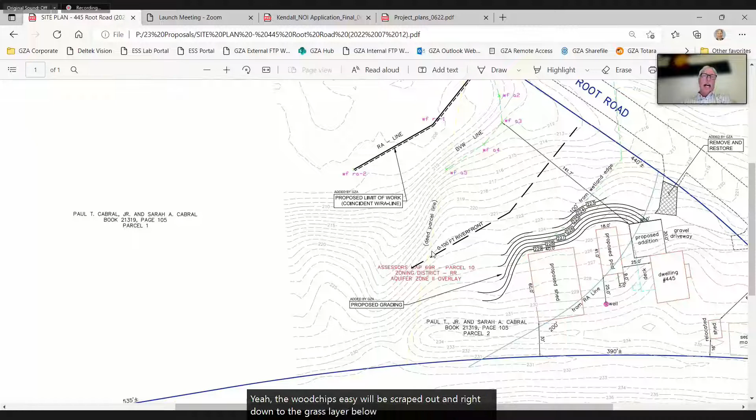This is really helpful. Is there any restoration being planned where that one stump was removed, and also the wood chips? Yeah, the wood chips will be scraped out right down to the grass layer below. Both sides of the wood chip pile have predominantly upland ferns, hay-scented fern, and some other upland species. So I think by removing the wood chips, those herbaceous species trapped underneath will start to grow.

They'll come up. The one stump in this curve right here, in the contour right above this label, that's kind of a flat area. We could put a couple of shrubs in there to replace the tree, or put another tree in if you'd like - a red maple would be good. I personally wouldn't recommend white pine because at some point that's going to be a problem tree and people will want to cut it down. A red maple is a little slower growing, I think that'd be fine over there.

Restoration within this area - we're open to putting in shrubs. We could replace all the tree stumps, the 10 tree stumps, with a native shrub, meaning native to your county. I'd have to take a look at those and I could give you guys a list. But there'd really be 9 - we have 1 stump in the 100 foot buffer and 9 outside, so it'd be 9 shrubs we'd be planting in this area.

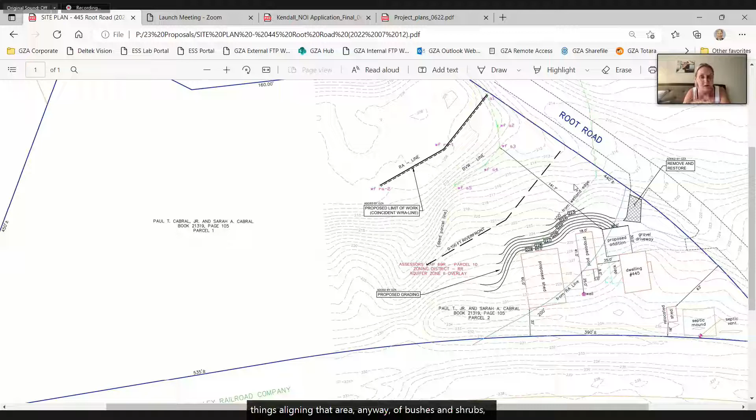I also spoke to Karen about that little dip area - this right here, yep - I planned on growing and putting things lining that area anyway, bushes and shrubs. So I do want stuff to help suck up some of this water for us.

Sounds good. As we mentioned at the site visit, we do have a list of shrubs. I did get it, yeah, I did get it, and I plan to pick from those - I think it was 3 or 4 pages, quite an extensive list.

All right, thank you. I noticed when we were discussing this on the site visit that you were thinking of changing the position of that large shed so it's not so perpendicular to the railroad tracks, but I don't see that on this plan. I know it was kind of close, you guys were concerned it might have been a little too close, and I said we could turn it vertically or keep it horizontally if you guys had a preference.

And I'll be honest with you, from a practical perspective, even if they rotated this, the grading would actually reduce. The limit of work will not change, even if they change the position of the structure. So I would suggest we look at the limit of work and the potential for sedimentation versus the angle, whether it goes with the contours or across them, but we'll never go outside this limit of work, this limit of grading. Because this is what we're telling you, we're not going past this line.

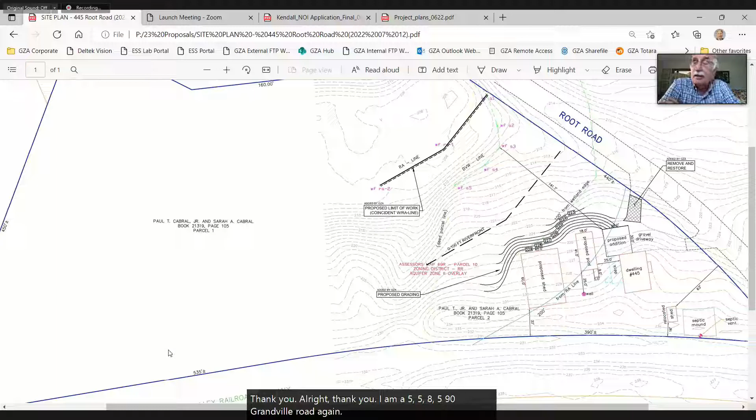Item A, 558-590 Granville Road, again continued from 6/28/2022. Dan, could you please stop sharing your screen? Yep, sorry about that. Thank you, I'm trying to get out of this. There we go. Thanks, everyone.

Okay, Ryan, you want to give us an update? Sure. Hello everyone, Ryan Nelson from R. Levesque Associates. We've been in talks with DEP on their issuance comments, and we're in the process of obtaining a consultant to conduct a wildlife habitat study due to some of the thresholds for alteration. That has not been completed yet, so we're requesting a continuance for tonight.

Thank you, so I'll entertain a motion to continue until 7/26. So moved. We have a second. Second. All in favor? Lauren, yes. Carl, yes. Yes, I'll vote yes as well.

Thank you. Item B, 0 Bayberry Lane, Samuel Shokov. In accordance with the provisions of Massachusetts General Laws, Chapter 131, Section 40, a public hearing will be held at 6:30 PM on Tuesday, July 12, 2022, by virtual meeting regarding a notice of intent submitted by Samuel Shokov for construction of a single-family home and associated site improvements at 0 Bayberry Lane, 46R-59 and 46R-60 in Westfield.

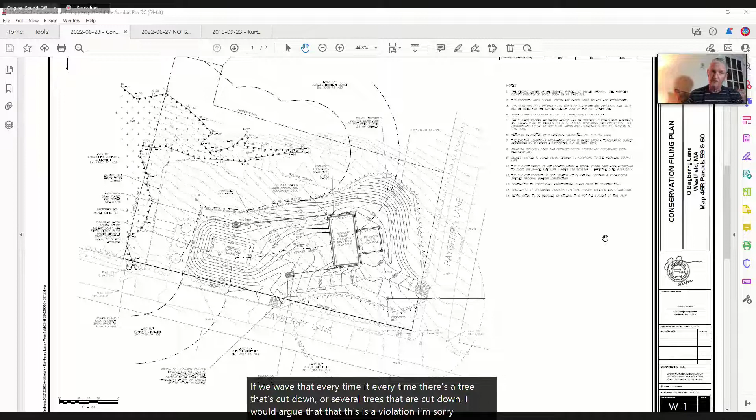I would argue that this is a violation. I'm sorry you don't have room, but there must be something that could be done. We're proposing to restore the inner 50, but the violation is going to be part of the work zone under a notice of intent. So your solution is to plant 3 maple trees, correct? For the area within the 50 that was altered, yes. Right, which is what the commission requested of them, was to restore the 50 feet. That was the motion.

Thank you, Tom, we can take your suggestion under advisement later in the meeting. All right, entertain a motion to close the EO and let them continue with the NOI. I'll make that motion. Second. Any further discussion? Seeing none, all in favor: Lauren yes, Carl yes, Tom yes, I vote yes as well, thank you.

Okay, we're back. Entertain a motion to resume 4B in regular order. So moved. Second. All in favor: Lauren yes, Carl yes, Tom yes, and I vote yes as well. Okay, on to the NOI. Thank you.

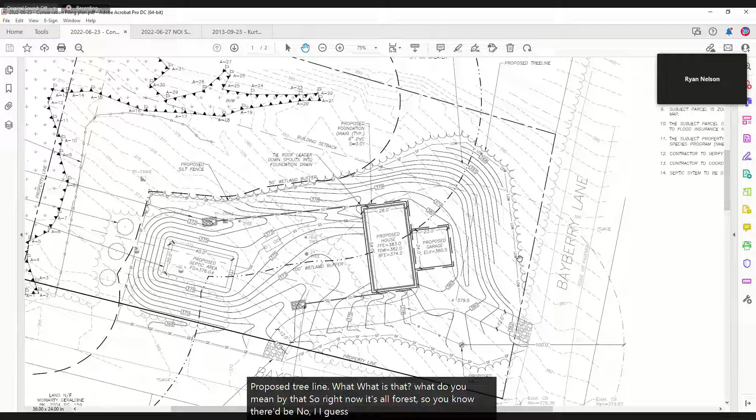All right, thank you. Ryan, what do you mean by the proposed tree line at the very top right of the drawing? So right now it's all forest, so at the limit of work is where the forest would start - just trying to show an envelope of where the forest would remain. So there's going to be a whole mess of trees cut down within the 100-foot boundary, is that correct? Yes, this area right in here - this is the 100-foot boundary. And it's pretty much all trees right now? Yes. Thank you.

Are those the current trees you have labeled, like the pine tree by the septic system - are those going to be cut down? Yes, those would be removed. This existing tree line just shows the limits of clearing that occurred a few months ago, and we located some lone standalone trees that were left for whatever reason within that clearing. But all the trees within the limit of work would have to go due to the site grading here.

Okay, other questions from the commission? Do we have DEP comments? Let me pull those up. We have a file number, 333-818.

I think there were 2 comments. One had to do with the latitude and longitude being incorrect, and it was corrected. The other had to do with some other minor thing I can't remember. We're on B, not C, excuse me. The latitude's on the next one. I believe it was the same comments. Unless I'm getting them completely mixed up.

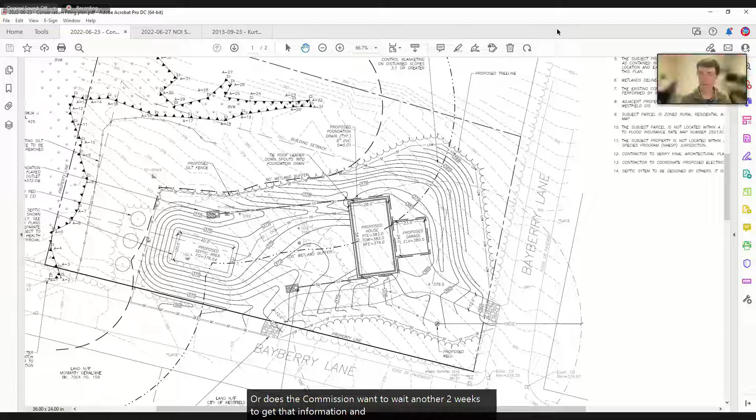Since we're dealing with a potential order of conditions, do you want this administrative addition to be part of a special condition, or does the commission want to wait another 2 weeks to get that information? In this case, I think I'm all right with it. DEP's concerns seem pretty minimal to me.

All right, thank you. Any other questions or comments from the commission? Any questions or comments concerning this project from anyone in the audience? I have to read 3 letters from concerned Bayberry abutters.

First letter: my husband and I live on Bayberry Lane across from where this gentleman wants to build, from what I understand, a 5,000 square foot barndominium. I don't see this as a one-family home. This house and the other proposed houses are to be built on wetlands. Just go look at the water in the holes that are there from their clearing of the land. This area gets very wet, especially in the spring. The road is not the best of repair and gets worse. Oh my God, sorry, I hate thunder.

A lot of the runoff has come from the area he has stripped of vegetation, thus increasing damage to the road. Years ago there was a for-sale sign on that land. I asked the realtor if it had perked. She said no, but it will. It had not perked in the past, and a few days later the sign was gone. I stopped where there was action this spring and asked what they were doing. I was told they were testing it to perk. I said it hadn't in the past, and he told me, we will make it perk. Now it is nothing but a wet mess with runoff to further damage an already wet area. Signed, Leslie and Tom Perry, 62 Bayberry Lane.

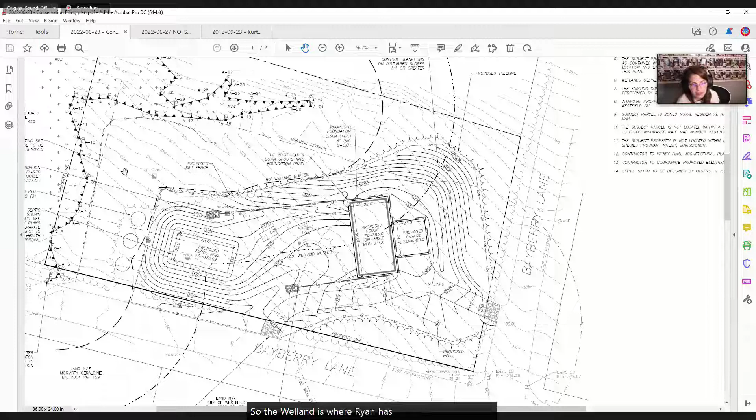When you guys were out there, were you walking in water? Is it as wet as she makes it sound? The wetland is where Ryan has it mapped. The site right now has been disturbed because it's been cleared, so there are holes where there is water, but it is not a wetland.

Can she speak to where they did the perc test? I don't know where she's talking about. The groundwater is shallow there, within a 20-ish range. There were some areas in the clearing out front where they pulled the stumps, and it leaves a 3-4 foot hole. That's below the groundwater table in early spring when they probably saw it, so it filled up, but that has all since receded.

We good for the next letter? I mean, when we were out there last week, I didn't see any standing water.

No, no. Okay, next letter.

Since then, I've spent the past 5 years living a totally changed existence due to the accident. It left me with debilitating back injuries, including continuous chronic pain from spinal compression fractures and nerve damage. This included many episodes of suddenly becoming paralyzed in both legs, being unable to get up, sit in place, or walk.

With additional health issues, I have needed to call 911 for frequent assistance and transport to Noble Hospital. I need to use PVTA to get to most medical appointments. I have been mostly homebound otherwise.

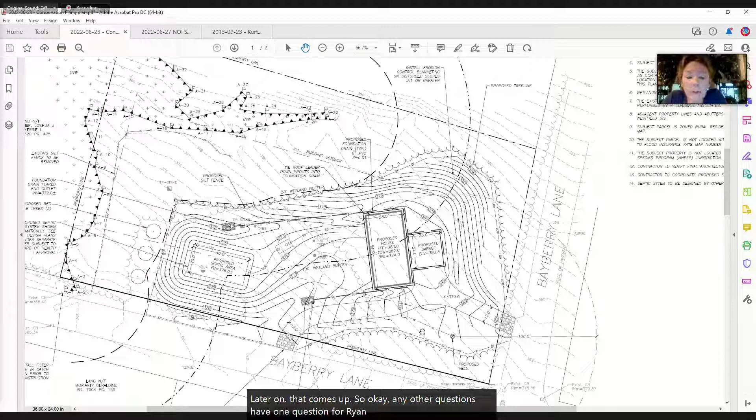Okay, any other questions? I have one question for Ryan. Did you consider dry wells, or is that even an option here? I don't know where your groundwater is, but for that concern, I think what I'm hearing from the commission is about flow onto the road, which I think is a legitimate concern of the neighbors. Is that an option?

We don't have a lot to work with due to groundwater elevations. There's only about 20-something inches down to seasonal high groundwater. We could perhaps put some in the higher fill areas, but then you wouldn't get gravity flow from the drains to those locations.

Right, it might be effective in summer months, but when you have spring and fall and groundwater's high, they'd just be submerged, I would think. It wouldn't be helpful around the actual building itself.

You think you don't have enough room? No, there's room, the problem is you'd be within the groundwater table. Yeah, that's what I meant, room. Yeah, just trying to think of alternatives. No, that is a good idea. If that groundwater issue wasn't the case here, I definitely would be in favor of that.

The outfall that's going towards the left, the bottom one, how are you going to stabilize that? There'd be an armored stone riprap flared end outlet there.

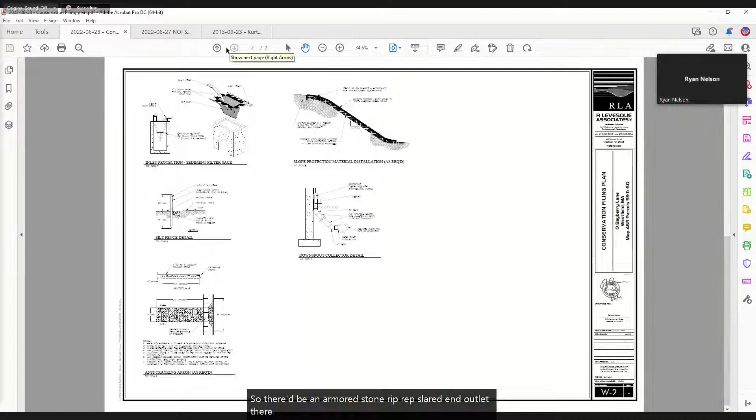I don't have a detail of that, but... is that the best location for it? Yes. We wanted to put it down gradient of the driveway, so we're not washing out our driveway. And we didn't have the elevations to get it over to here because there's a septic tank and a sewer line in the way.

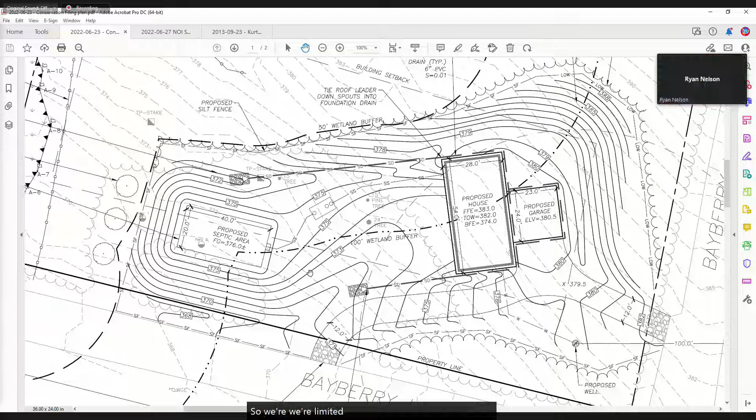So, yeah, we were limited based on where the leach field had to go. You didn't want to put it any farther to the left?

So it daylights on existing grade here. I mean, we could continue it farther, but then we're getting into the town property. We could go a little farther, maybe 20 feet or so, we could certainly do that. I just wanted to give it room to disperse before it got onto the town property.

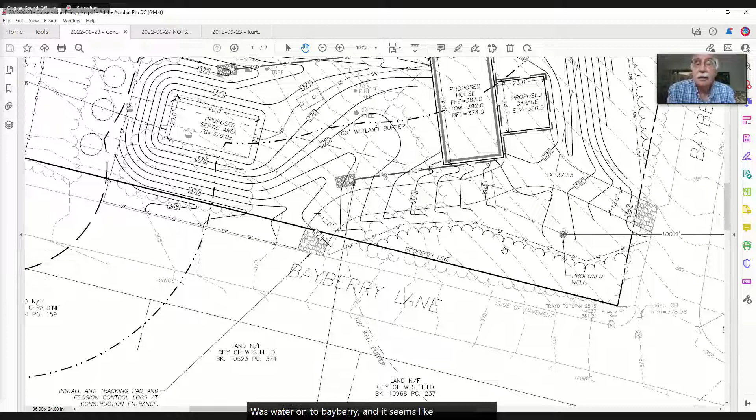Well, it seems like the main focus of those three letters was water getting onto Bayberry. And it seems like your mitigations here, especially with the new swale, would help to alleviate that.

One of the letters also mentioned signage. Is any signage going to go up on the property? As always, shame on me, I should have put it on the plan, but yes, we can put signage along the limit of work. That's no problem. Nice observation, Lauren. Thanks, Tom.

Okay. All right, anything else?

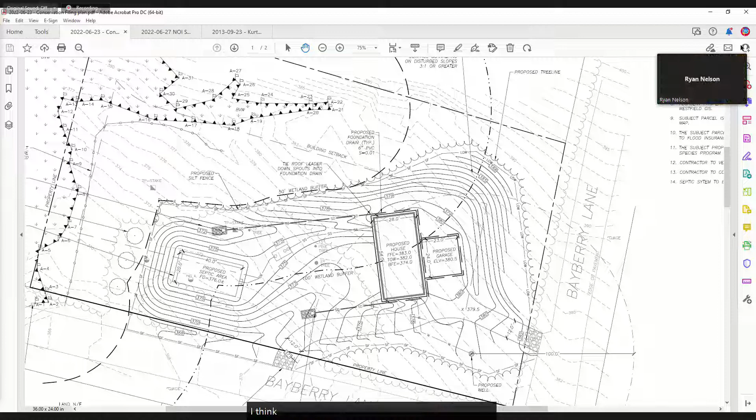Do you have sign off from the health department yet? We have not submitted septic plans to the Board of Health yet, no. Do you anticipate any problems with that? If you would have to, if they would require you to change that, that may affect this application. I don't foresee any changes. We've sized the system based on the design flows.

It's elevation wise, it's all roughed out. I mean, we pretty much designed the septic, just haven't submitted it yet. So it's been designed to Title V standards, so I don't foresee any changes needing to happen.

Is that a concern, Karen, if we approve this? Only if the Health Department did not approve of what we're seeing and they had to alter it in some way. Right, that's my only concern. In which case we would come back to you with a revised plan, but this would be closed. So for a notice of intent, that's my concern.

You know, you're not going to be building this next week, so do you want to go through Health Department, keep this open to make sure that is copacetic with them, and then you get commission's approval? I'm pretty confident, we really have no other option or location here, so.

But we think if we approve, we'd like to get conservation approval first, and then we'd submit to Board of Health, and if things change, we can come back with an amended order or something. Could that be a special condition?

It would have to be a new order, right? Well, depending, but yeah, I guess that's your risk, the risk you're taking. You recognize it. Okay, gotcha. What is your time frame for Board of Health?

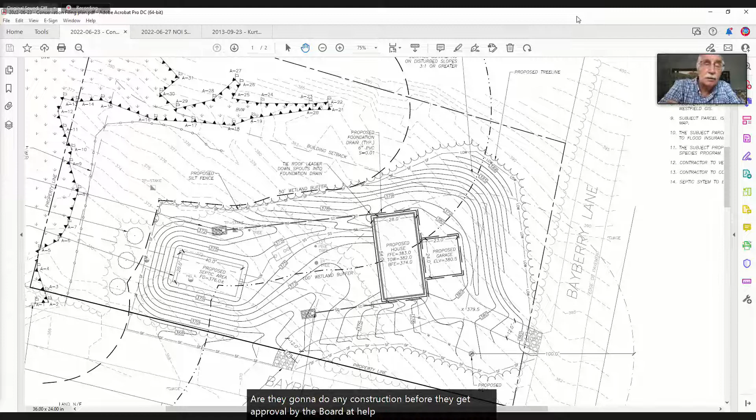Are they going to do any construction before they get approval by the Board of Health? Maybe, I doubt it. I mean, he wouldn't want to invest any more in the property if it's not viable, so he'd probably wait till he had all permits in hand.

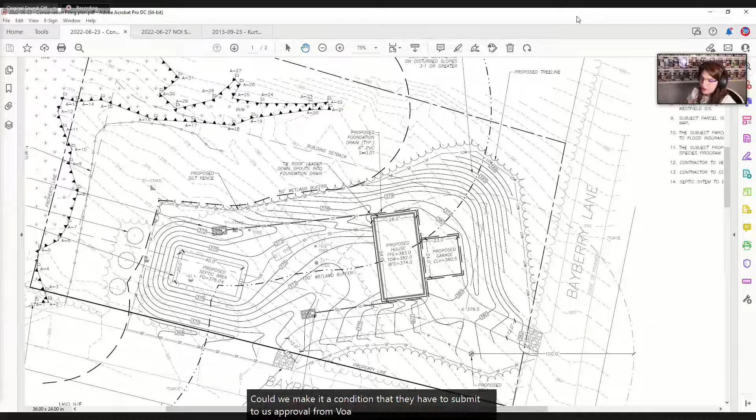Could we make it a condition that they have to submit to us approval from BOH prior to construction? We do that regularly, but the concern is if the Health Department looks at their plans and changes them, and we've already approved a certain configuration, if that makes a change, then they actually have to do a new notice of intent if it changes it significantly.

So that's my concern. But many times the commission, I'm sure the commissioners remember, puts a condition saying before you put a shovel in the ground, you've got to submit approval from the Health Department to the commission. That sounds like a reasonable condition.

But that seems to be the only place where a septic system could go. Right, and Ryan's pretty confident. Well, it's their money, I guess, if they have to do another NOI. Because once we approve this, that's it.

So are you that confident, Ryan? You're suggesting we close the hearing tonight? Yes, if we have to revise things later on, we'll address it then, but this is the only option for a septic area as of now.

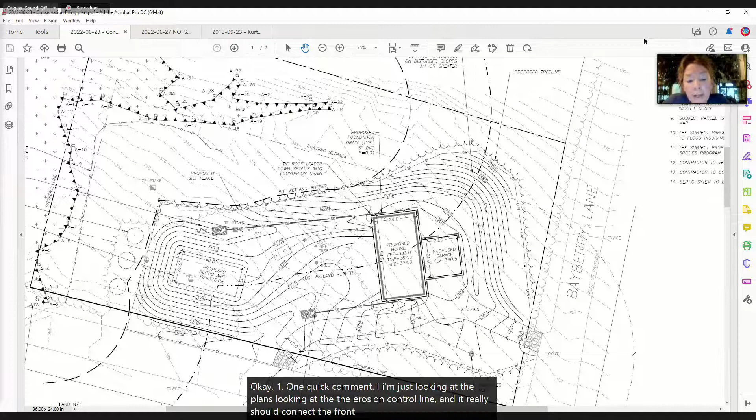Okay, I have one quick comment. I'm just looking at the plans, looking at the erosion control line, and it really should connect the front of the property by the septic. It doesn't enclose the entire property, unless I'm not seeing it. Wait a minute, am I not seeing it? Where are we talking here? Oh, it does, across. I'm sorry, yeah, I am wrong, I didn't have my glasses on. It's okay, a lot going on. You mean the silt fence at the bottom? Yeah, I didn't see the line there, that's all. So they're covered. Thank you.

All right, so we have a motion. Do we have a second? Yep, I'll second it. Any further discussion? Seeing none, all in favor? Tom, yes to close. Lauren, yes. Carl, yes. I'll vote yes as well. Thank you. All right, you want to post the orders, Anna? Yeah, thank you.

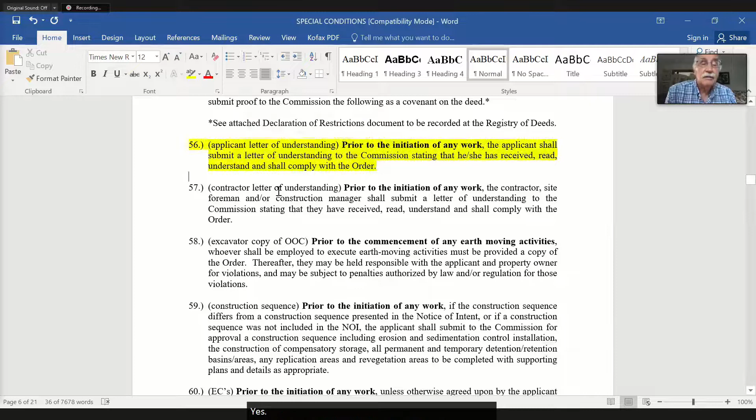Okay, here we go. So there's no SWPPP involved here. 52D, grabbing my recording mouse, yes. DEP sign, yes. Deed restriction language, yes. There's no wildlife habitat involved. 56, yes. 57, yes. 58, yes.

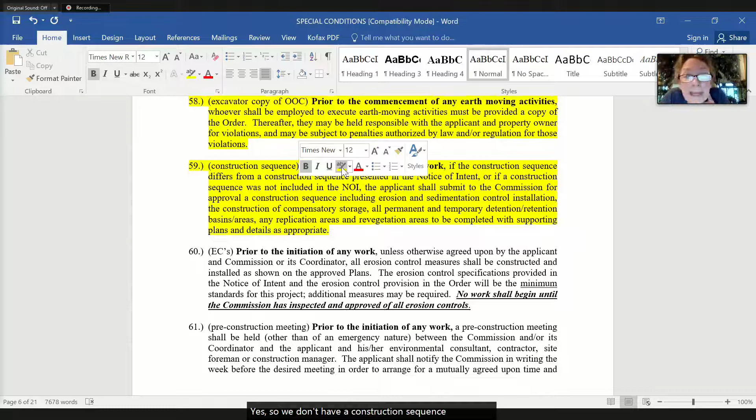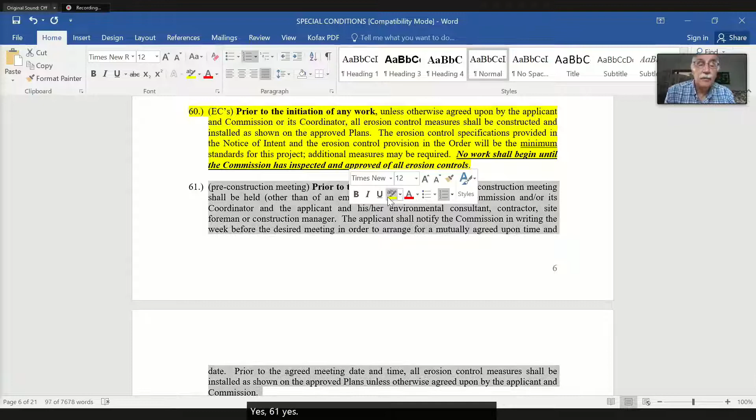59, yes. So we don't have a construction sequence, so that's going to be something, Anna, that you'll look for. Okay. 60, yes. 61, yes. 62, yes, and 63, and 64. There's no 65.

66, yes, they're putting markers up. Do you want markers, or do you want signs? Or aren't they the same? Two different things. All right, so let's do 67 then. So what do you want for signs? Be specific. It's usually every 50 feet or change in direction.

We had some changes last time. I wasn't given specifics, and I called Karen and asked what do you think they would do. Typically you guys have done every 50 feet or every change in direction. I thought usually we did have a policy on that, Karen. Didn't we? We never adopted a policy about every 50 feet. I thought there was standard language. This is right here, number 4, yeah.

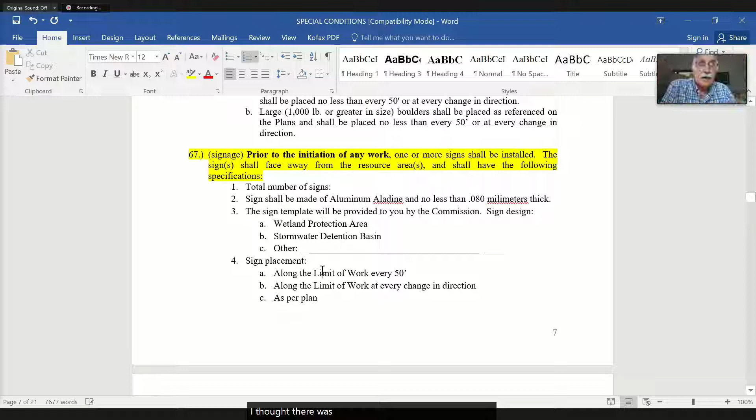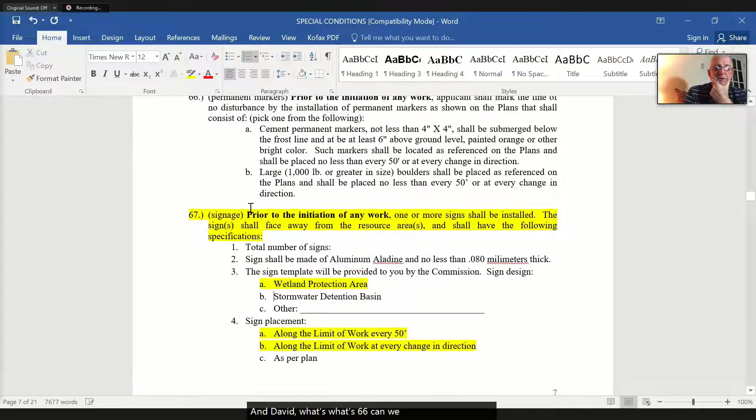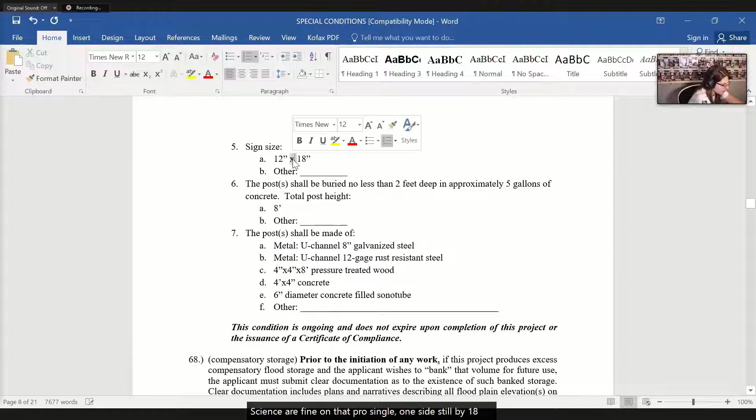All right, do A and B. Okay, and David, what's 66? Can we do both? Well, those are markers, like boulders and stuff like that. Signs are fine on that, single family, I agree. I thought it was something else. Okay, sign size, 12 by 18. Yeah, the typical sign, Ryan knows what they are.

And I never really got a good answer. We do have a policy, don't we, Karen? Didn't we? No, this is it. We never instituted a policy, we incorporated it as a condition. So we never made up something simple on one page that we send to applicants? Nope, this is it, this is what they get when they get their permit. You get to make the decision right now, right here, what you want. That's pretty exciting. All right, thank you.

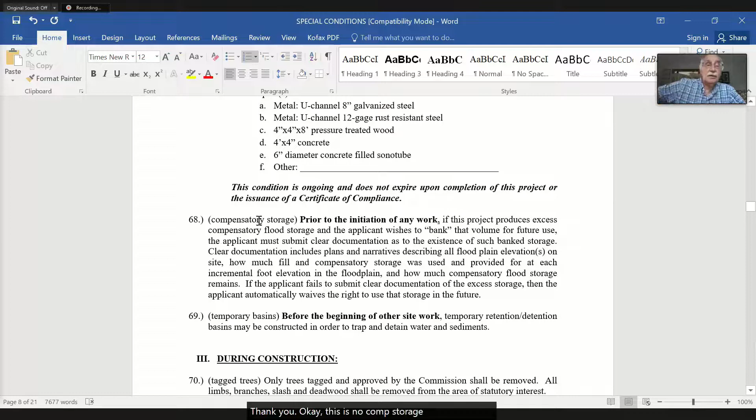Okay, there's no comp storage, there's no temporary basins. No, 70 wouldn't be appropriate, I don't think, because we have a limit of work. Right, there's no permanent basins. No salt. Not for a private home, I don't think so either. Okay, so on to 75, I think. Okay, yeah, so 75, yes.

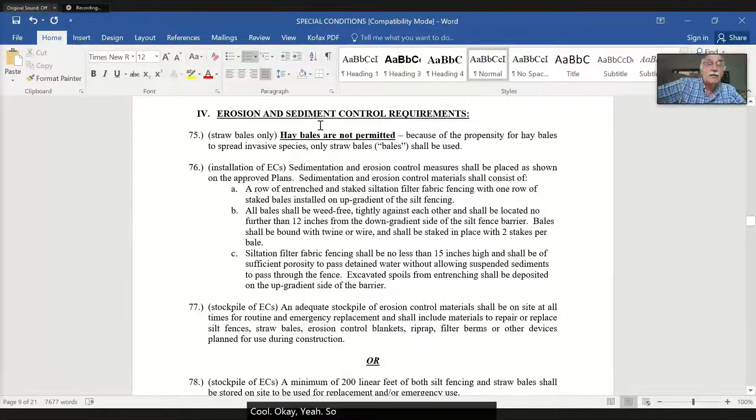Oh, my computer's frozen, please hold. Work with me, oh my gosh. Okay, all right, 76, yes. And 77, yes. Okie dokie.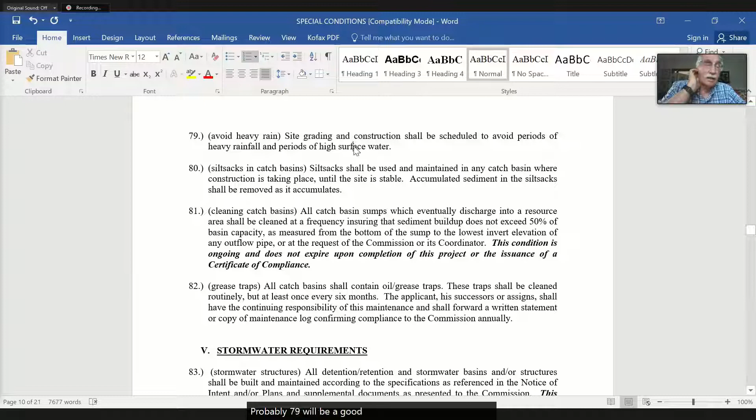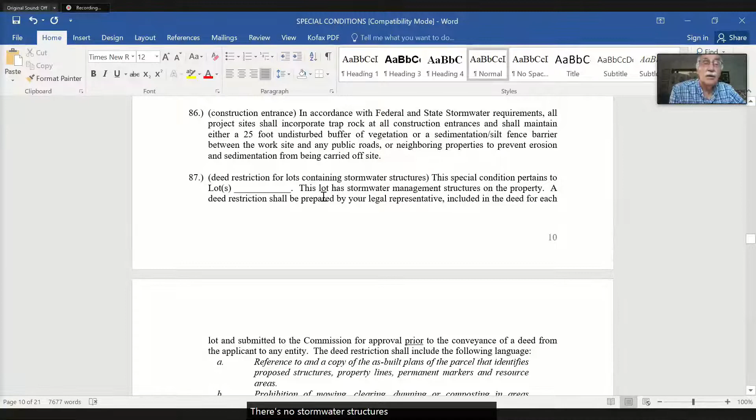Probably 79 will be a good one because they're cutting into the side of the hill. Okay, there's no catch basins involved, no grease traps, there's no stormwater structures. Wait, go back. Okay, well, they are actually having a construction entrance. Yeah, they put two of them on their plans, so you might as well put that in there. He did mention putting mats there. Okay, keep going, thank you.

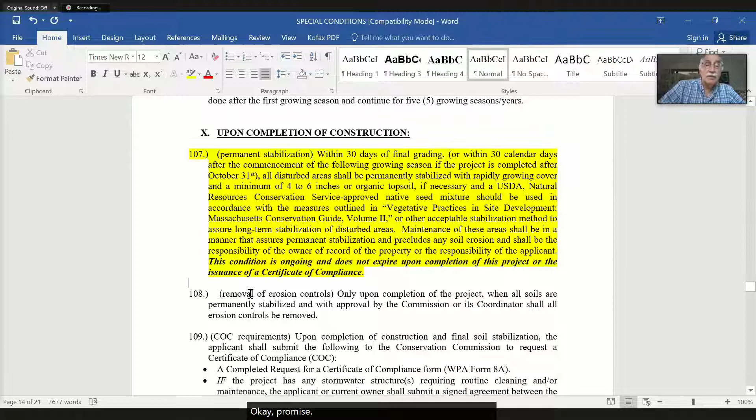All right, there's no environmental monitor, there's no dewatering, there's no dredging, there's no replication. Okay, permanent stabilization. Okay, 108 and 109.

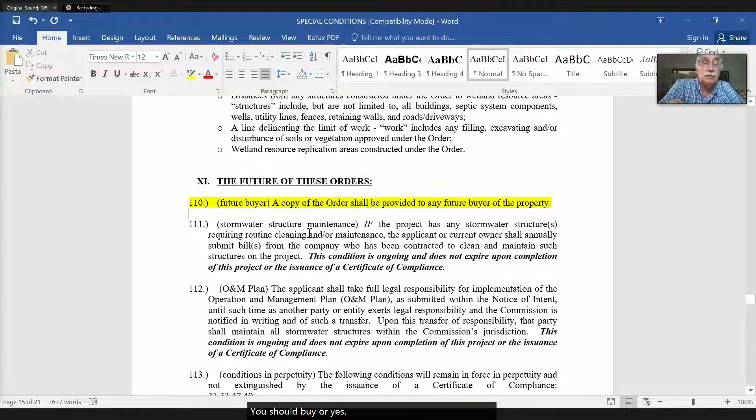Future buyer, yes. 111, we don't have stormwater. No stormwater.

How about maintenance of their outfalls? Well, it doesn't fall under stormwater. We could add a special condition that they keep them maintained, free and clear of debris, something like that.

Okay, so we'll add that as a special condition. I think you missed 109. It's highlighted all the way. Oh, gotcha. Okay, thank you.

Where would you like to add that as a special condition, before or after future of these orders? Upon completion of construction. I'm going to put it right after 108.

Maintenance - what do you call them, outfalls? I'm not sure what the technical term is. What did he call them on the plan? Call up the plan, because he did call them something. Give me a second.

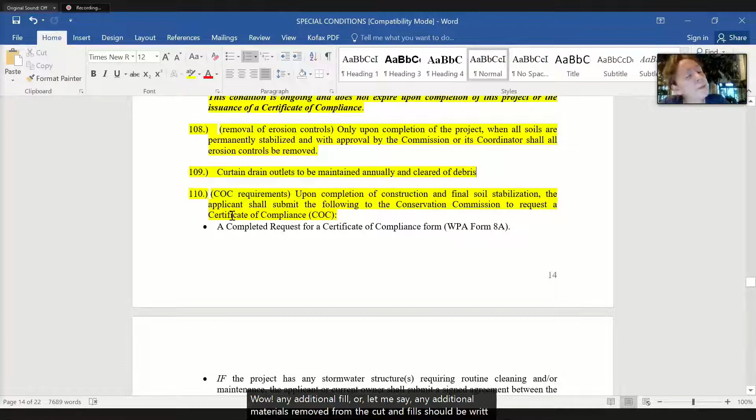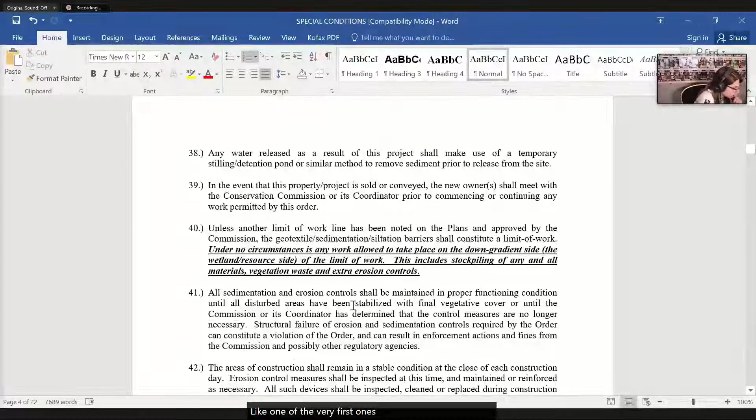What else? Any additional fill or materials removed from the cut and fills should be removed from the site. You don't want them throwing any stuff in the wetlands. Isn't that technically already a condition? It's like one of the very first ones. You can say any materials generated from the project shall not remain on site, you know.

We'll just add it as a special condition at the end - any extra fill shall be removed from the site, or cutting of trees, stuff like that, because they're going to be removing a lot of vegetation. You don't want them throwing it in the wetland.

All right, anything else? All right, bond. Oh, Jim, yeah.

It's buffer zone. What's typical for a single family, 5,000? Or is that too much?

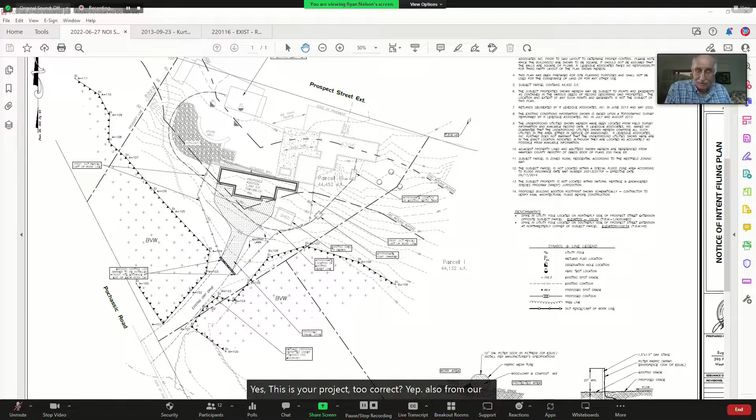Here's our site plan. This is a bit of a unique circumstance, so let me give some background history. The site is located near the Y intersection of Prospect Street Extension and Pochassic Road. The Kurtz's existing residence is this building here. Quite a few years ago, they submitted a notice of intent to build a retaining wall and do a septic system upgrade—they have a tank and pump chamber in the backyard that pumps up to the septic. As part of that NOI, they also included filling of a BVW near Pochassic Road and then replication. That work had been completed. However, the addition proposed at the rear of the home at the time was never completed—only the wetland crossing and replication work was done.

One of the DEP comments was whether a certificate of compliance had been issued for that work. I believe it was—Anna can back me up if I'm incorrect. Yes, on March 20th, 2000, the COC was issued.

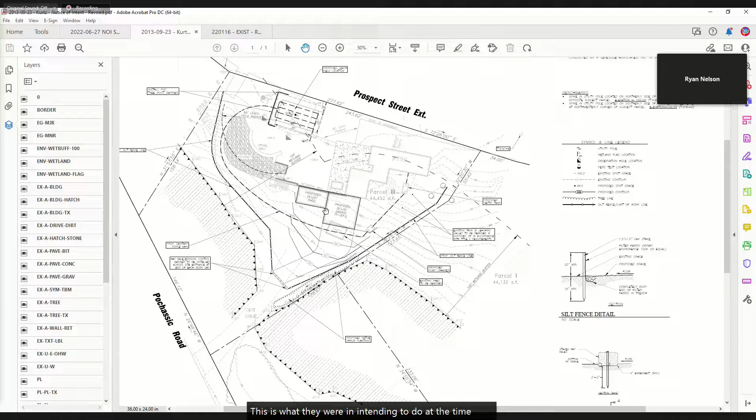So fast forward 20-something years, and the property owner would like to construct that addition at the rear of the building. We recognize where the building was formerly proposed—if I flip back to this old NOI plan, this is what they intended to do at the time: a 30 by 30 garage, and maybe a 16 by 20 addition off of that. On this plan only the 100 foot wetland buffer was shown; the 50 wasn't shown, but presumably most of this addition fell within the 50.

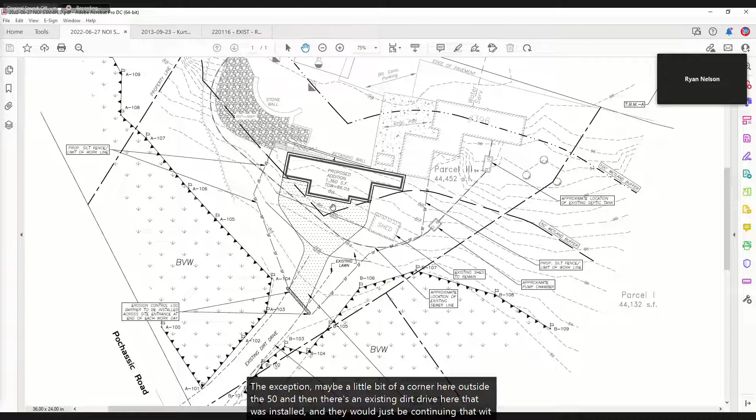We acknowledge Westfield's new bylaw regarding work in the 50-foot buffer, so the homeowners have shifted their proposed layout to be as conforming as possible to the 50 foot. We're keeping most of the proposed addition—this outlined building—with the exception of maybe a little corner outside the 50. There's an existing dirt drive here that was installed, and they would just be continuing that with some gravel up to the garage door faces of this addition.

So the limit of work would stay the same as originally proposed—just a silt fence going off the back of the house down to where the driveway work would resume, and then back up to that existing retaining wall. This is all taking place within existing lawn area. There'll be no cutting or removal of trees necessary, and very little change to grade—just maybe filling up half a foot or so, adjusting to get a nice slope up to the entry of that garage or barn area. So this is just buffer zone work within an existing lawn area.

Questions, anyone? So you say no trees will be removed, is that right, Ryan? Correct.

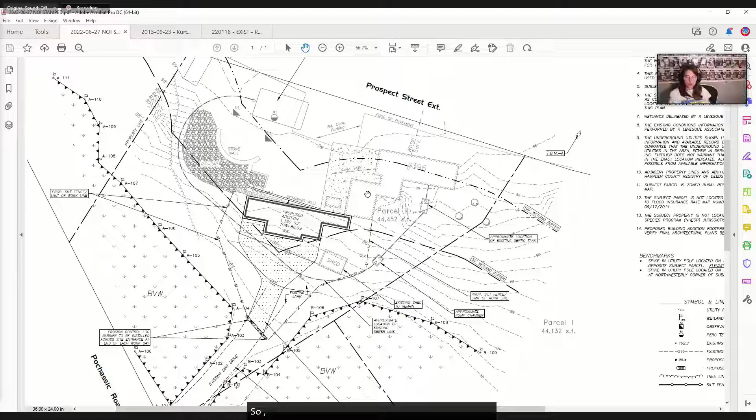Yeah, the design doesn't look different from what we discussed at the site last week. At the site, Ryan had said that only a small corner butted in and then went along the retaining wall. That is what is being presented here.

Ryan, that shed—is that being removed or staying? That's staying. That's staying, okay.

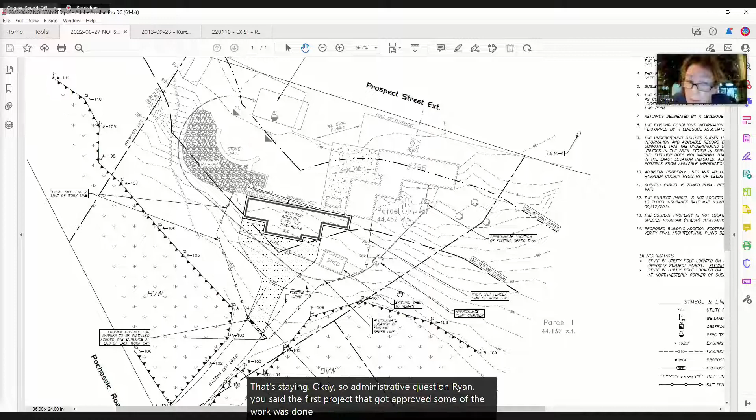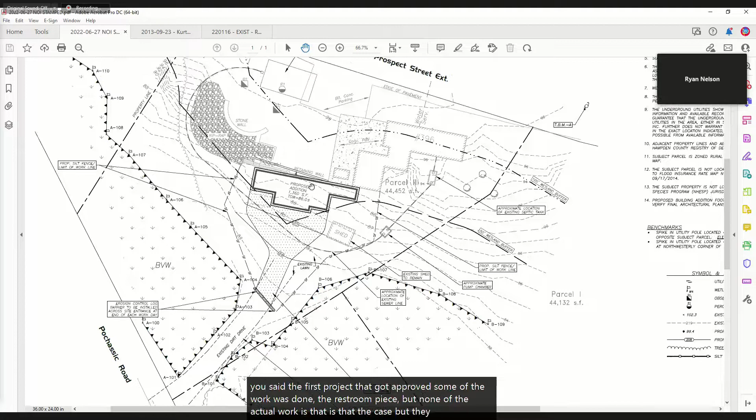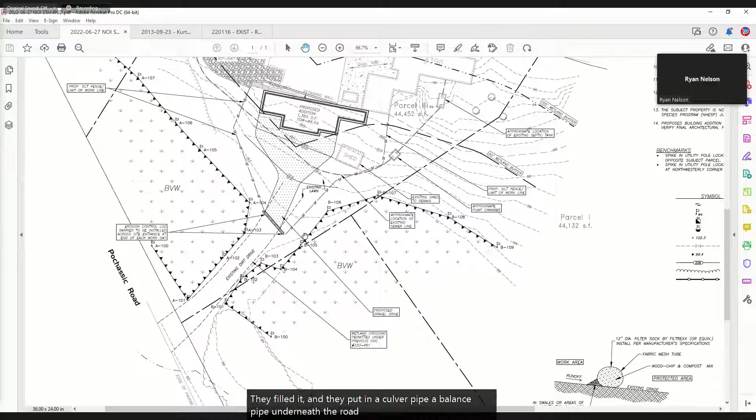So administrative question, Ryan—you said the first project that got approved, some of the work was done, the restoration piece, but none of the actual structure—is that the case? No, so some of the work, they put in the crossing, but they never built the actual structure. This was a contiguous BVW—they filled it and put in a culvert pipe, a balance pipe underneath the road. That was completed; they just never built the addition.

And they did the replication for that? Yes, correct. Part of that certificate of compliance request packet, Kate Bednaz at the time did a nice write-up on that and how things panned out.

Ryan, when was this project approved? March 20th, 2000. Thank you. That's when the COC was issued anyway, as far as approval.

Ryan, the application language indicated that the driveway is being widened—is that true, or did I not understand that? So the crossing area is staying the same, but they're widening the driveway up to the face of the barn.

The 2000 approval, how large was that? This is a 1,300 square foot structure. Let's see—so that's what, 900 feet, and then...

The original structure was about 1,220 square feet, and the proposed is 1,360. So we're about 100 square feet more.

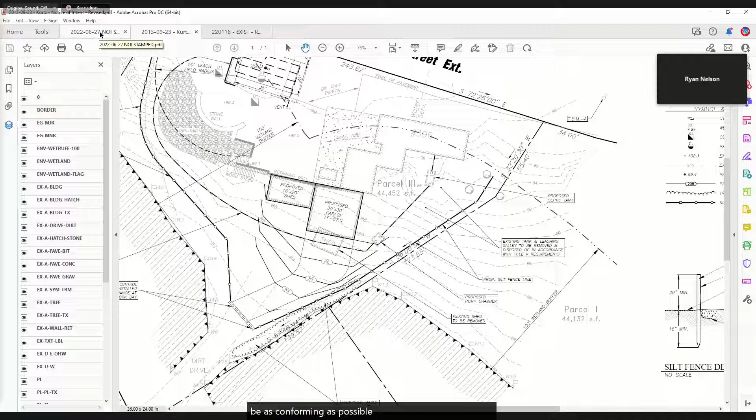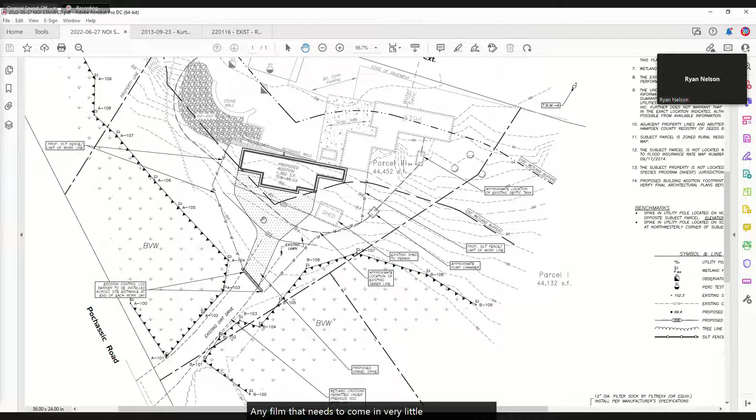So back to the current proposal. Any fill that needs to come in? Very little, maybe 6 inches right in here, that 84 contour, that existing one you're bringing down, about 6 inches at the most.

20 years later, how does the replication area look? I redelineated the site without looking at the replication area on the old plans, and I couldn't tell where it was, so it's there but it's blended in. That's good, yeah, it looks good.

Excellent. All right, other questions about this particular project? Again, they're keeping it outside the 50, except for a couple little corners. But it looks better than the previous one where you had one of them inside the 50.

Just a slab or a basement? Just footing, just a slab, no basement. Okay, and it'll sit up against that retaining wall. Correct, yep.

All right, any other questions? Nope. Any questions or comments from the audience concerning this particular project? All right, seeing none, entertain a motion to close the public hearing. So moved. I'll make a second. Any further discussion? Seeing none, all in favor? Carl, yes. Tom, yes. Lauren, yes. Well, thank you.

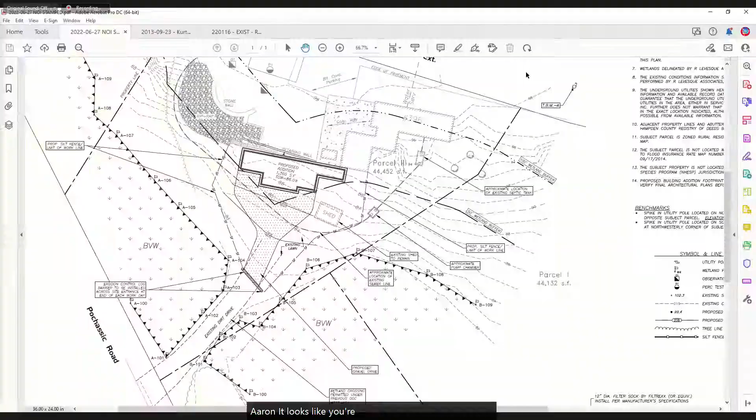Aaron, it looks like you're in a jungle. Are you in your house? I am, I'm in front of my ficus, my 12-foot ficus. You know, I was really tempted the other day. I went to a nursery and they had elephant trees, like the elephant meat trees, and I was like, I want all of them.

Okay, we'll skip 51. 52, yes. 53, yes. 54, yes. 55, no. 56, yes. 57, yes. 58, yes. 59, yes. 60, yes. 61, yes. 62, yes. 63, yes.

64, no. 65, no. 66, no. 67, no. Why no? I don't think we need markers. There's already a clear, I agree. I'm thinking of signage. Well, there's a clear demarcation between the grass and the wetland out there already.

All right, you know the site, I don't. And the others that were out at the site, do you think we need signs out there? No, it's very much wetland, lawn, house. I think it's okay the way it is. It would keep, well, I guess 20 years later they haven't crept, hopefully, but signs would keep that lawn from getting larger and larger, and that's the purpose of them.

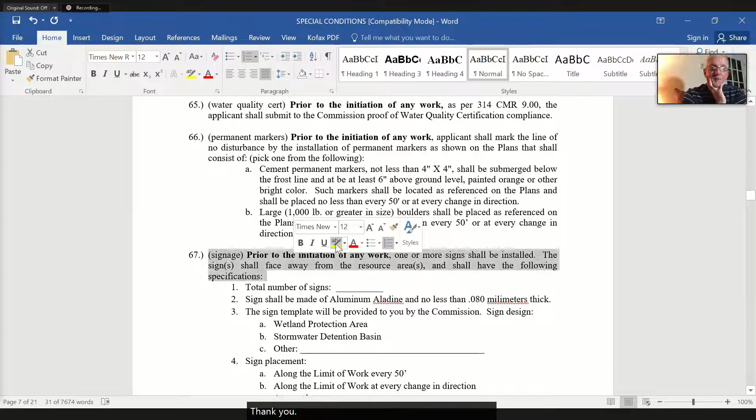Well, we could put a couple signs out there, but I think 2 would be sufficient. I'd feel better about that. How, you think 2 would be enough, Karen or Anna?

Mark them on the plan, or at least describe where you want them. It could always be on either side of that driveway, and then it could kind of mark where the wetland is on each side. Let me pull up the plan. Yeah, looking from the house towards Pochassic. Probably one in the middle, and then one on the other side of the driveway as Lauren suggested. I think 2 would be plenty.

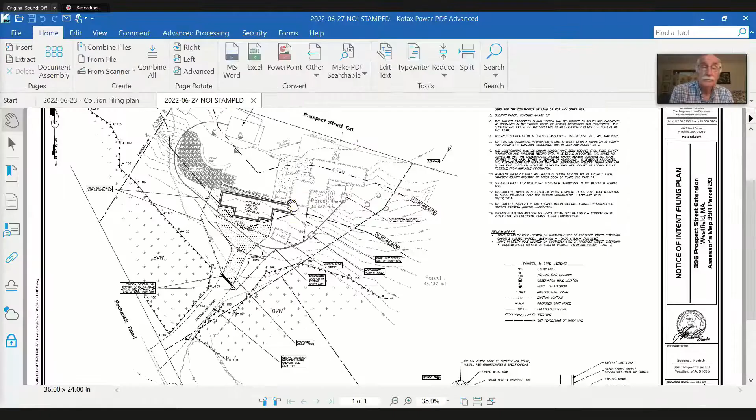Right. Okay, who's posting that? This is me, but I'm glad it's there. So at some point we must have talked about erosion controls, right? And they look good, right here. Yeah.

Okay, Anna, do you see where it says B106? We could stick a sign there, I think. Okay. And then one over where A105, one there. Okay, I think that would be sufficient.

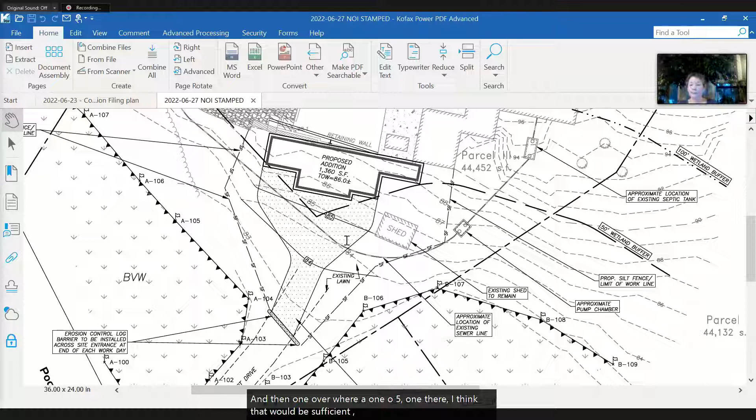Okay, so for sign placement, you should say 'as noted on plans.' If you're going to mark it on the plans, just say as noted on the plan. But they aren't currently on the plan. You're going to physically mark on the plan where we want the signs, and then you can give them a hard copy, or just say 'as per plan, by the commission's direction.' You can give that to them at the 48-hour meeting. Sounds good, thanks.

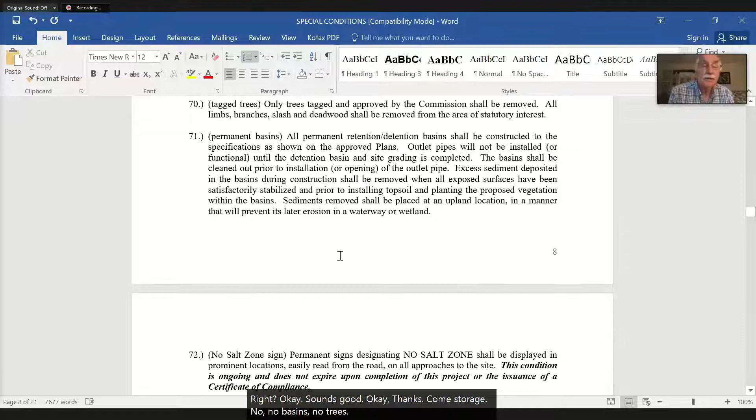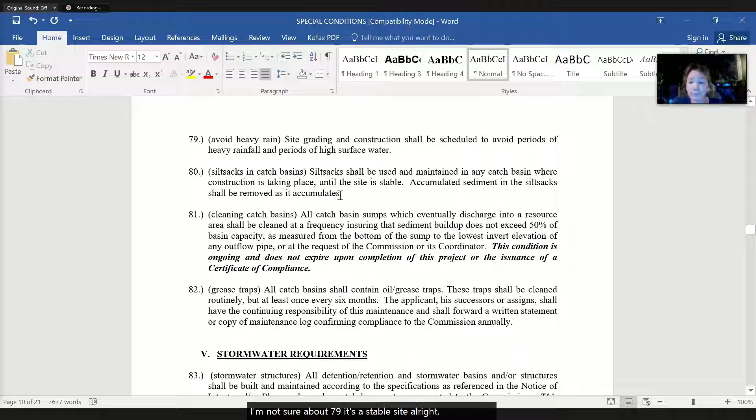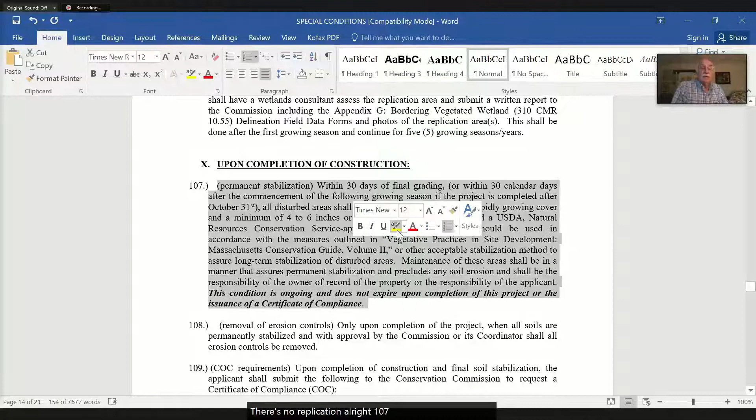All right, comp storage - no basins, no trees, no basins, we don't need those either. 75, yes. 76, yes. 77, yes. I'm not sure about 79 - I mean, it's a stable site. Okay, we don't need any of those. Roman numeral 5, there's no stormwater involved, no monitor involved, no dewatering, no dredging. Go back up to number 9 - there's no replication. 107, yes. 108, yes. 109, yes. Future buyer, yes. Okay, we don't need 11, we don't need 12.

I would say probably less than the previous one. Yeah, I would say so too. Either $500 or $1,000. Yeah, let's say $1,000 - there is a nice wetland there, so I think that would be sufficient. And it shouldn't take them long to complete that either.

Okay, any other special conditions? Nothing I can think of. Yeah, okay, all right, thank you.

All right, I'll entertain a motion to approve the order of conditions as written. So moved. Have a second? I'll second it. Any further discussion? Seeing none, all in favor - Lauren, yes. Carl, yes. Tom, yes. I'll vote yes as well.

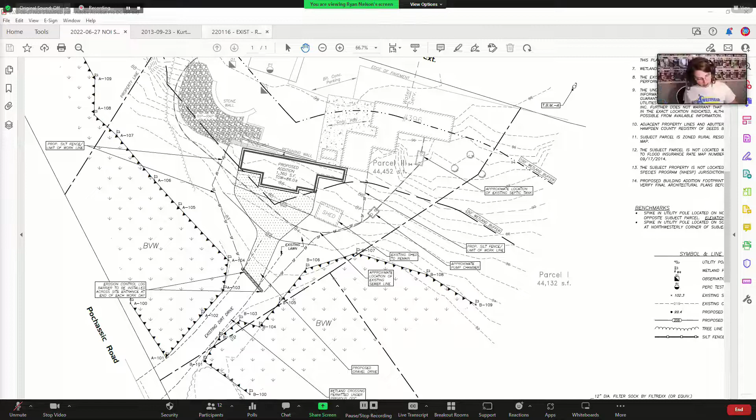Okay, A, 0 Bayberry Lane, continued from 6/28/2022. Welcome back, Ryan. So we had a site visit last Friday from Mr. Novanko's property. This is the updated delineation. As you can see, he owns these 3 parcels, 68, 69, and 70. 68 and 69 is where the violation occurred. Pretty much the entire site within this limit of work line was cleared, including the BVW and most of the 50-foot buffer zone to the BVW and to a small intermittent stream.

Obviously, Mr. Novanko is going to be restoring the property, but his intent from the start was to build a home here. So I brought a concept plan tonight for informal discussion, if the commission would want to entertain it. Mr. Novanko spent a significant amount of his savings buying this property, and not being able to build due to the 50-foot buffer is definitely a hardship for him. He's talked with the Westfield Law and Treasury Department about the abutting upland parcels owned by the city, but unfortunately they're not available for transfer at this time due to various reasons, so that's no longer an option for him.

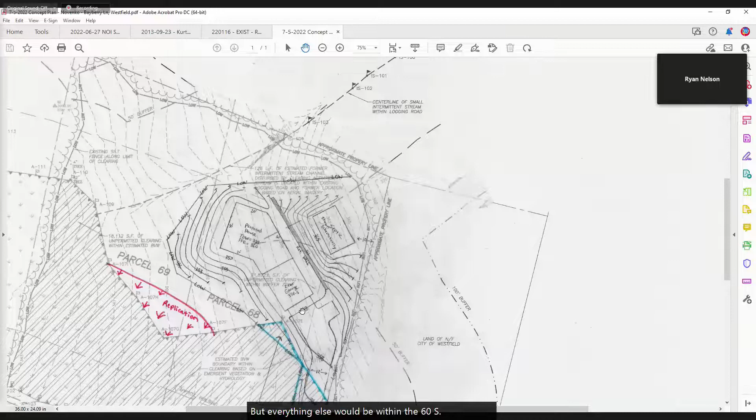As you can see here, this is the 50-foot buffer zone. The septic leach field would be located outside of that, but everything else would be within the 50-foot buffer zone. Obviously, there'd be replication required for the driveway fill through the wetland. We're just trying to get an idea if this is something the commission would entertain. If so, we know the permitting path from here. If not, Mr. Novanko would have to restore the whole property and, unfortunately, just bite the bullet and find somewhere else when he could afford it.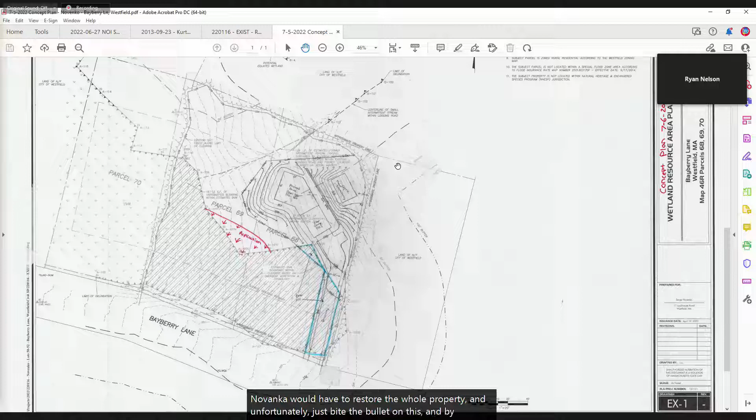All right, any questions from the commission?

I'd looked at the concept plan when you submitted it, and I guess I had confused the house with the septic. So the septic is the only part that's outside the 50-foot buffer? Correct. For new construction under Title V, it has to be outside the 50-foot buffer zone. So the septic would be above the house area, and it would need a pump chamber up to the leach field.

If I may interject, this is an enforcement discussion, not a proposal, so be very careful, Commission, as to what you say. Right, and I understand it's really a gray area. We just didn't want to go with an all-out restoration of the entire property if by some slim chance he got permitted.

I'm sorry to interrupt. I think the issue right now is you have to comply with the enforcement order and then approach it as a development. So how are you complying with enforcement right now?

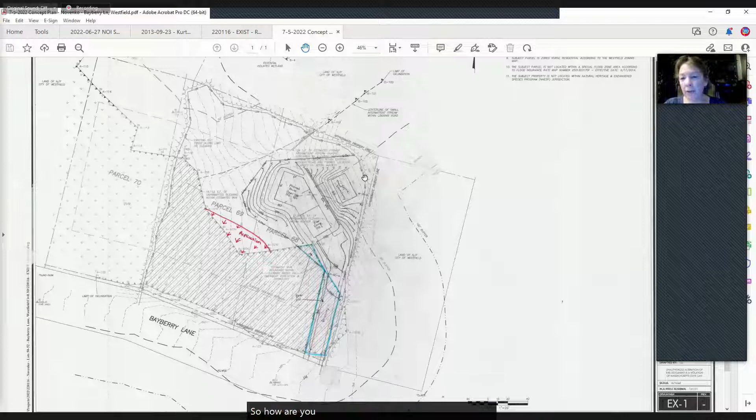Give me one second, our office lost power here. I'm switching to my laptop.

I think what they're looking to figure out is, do they have to restore the whole site, or would the commission be open to discussion in the future about building again? That is kind of an appropriate request.

It's a gray area. I get where you're going, Brian, but the issue in front of the commission is the restoration and the delineation that we have today. I think it was discussed on the site visit, maybe looking back at the delineation at the end of the growing season, just because it's only at about 25% growth, and seeing how much can come back.

Yeah, that seems like a reasonable place to start. In addition, any thoughts of what to do in the future would need to have a pretty clear delineation. Correct. So, yeah, waiting until we have more growth, I think makes sense.

So you suggested waiting till fall to take a look at it again? Yeah, so we know a little bit better what we're actually dealing with.

In my opinion, there's a pretty good herbaceous cover that has come back, so I'm not sure waiting till fall will change much. It's not like you're going to have trees popping up in that amount of time. It's just your herbaceous stuff is there. You're going to be looking at the same species come fall time.

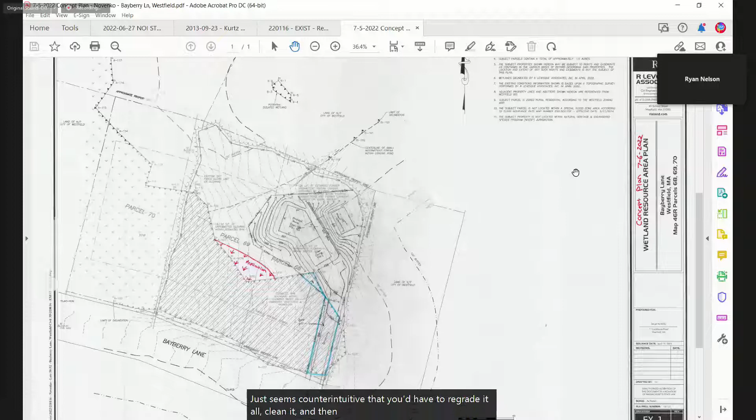I'd just be concerned that when it comes time to do the restoration work, you have a fully vegetated site. It seems counterintuitive that you'd have to regrade it all, clean it, and then replant it again. So it'd probably be best to do it while it's fresh.

Ryan, what was the extent of the butchery that was done on this property? How many trees fell? I couldn't even give you an estimate. It was all taken away and the stumps were removed in their entirety, ground and taken away. So it's just pits and mounds of stump holes and dirt. I really have no idea.

So like Karen is saying, have you put together a remediation plan? Not yet, we just had the meeting on Friday on the revised delineation boundary. But that's where you should be headed. Yep, understood.

And if I may, given that we have roughly 20 to 30% vegetative cover, if we're basing that delineation solely on that limited volume of data, I would recommend waiting at least to the end of the year, if not further, to get a good indication, because we're basing it on vegetation alone. Hydrology was disrupted, soils were very disrupted.

So what's left? We have the seed bank. So Karen, you feel there's a chance that Ryan's delineation would be different if he were to do it?

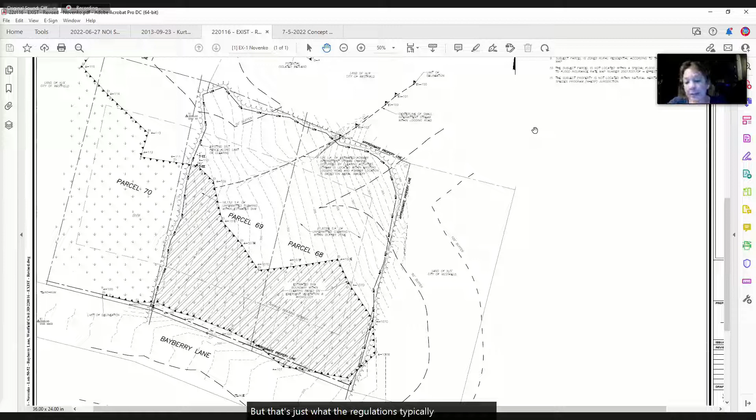All right, so I guess we need to continue this. Do you want to wait a few months, or keep this going every two weeks? I guess whatever the commission feels is a satisfactory time to review the vegetation on site. I would recommend end of growing season, but that's just what the regulations typically look at. It's up to you guys, though: 75% regrowth, end of growing season, along those lines.

That would take us at least till October, wouldn't it? Right, correct. And then at that point, Sergey would have to wait till next year to do the restoration work.

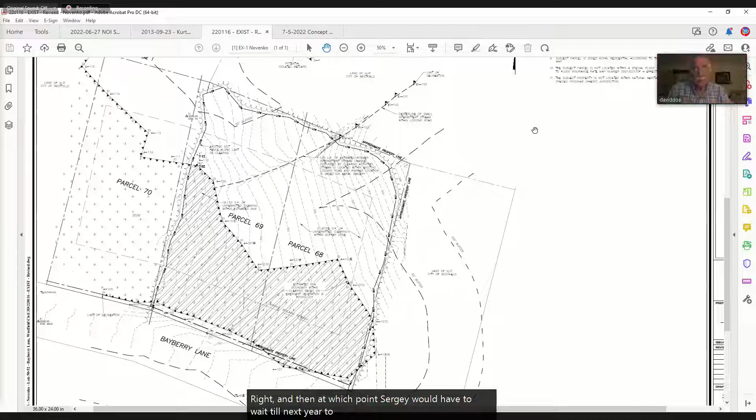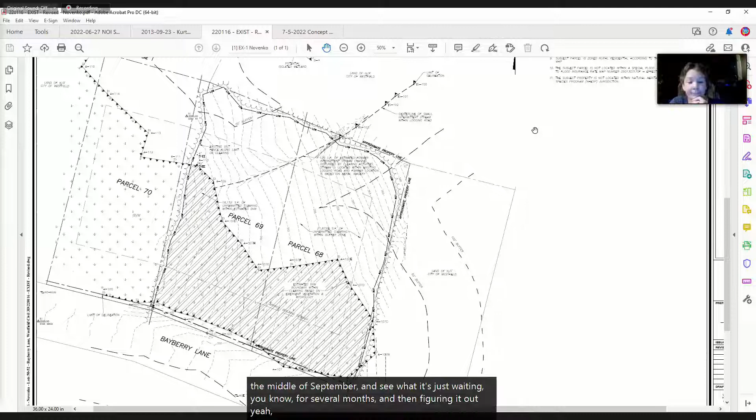I would suggest maybe doing it after a month, just to see if anything happens. That'll give us the middle of August and the middle of September to see. It's just waiting for several months and then figuring it out. Yeah, absolutely, so I suggest we continue until the 9th of August.

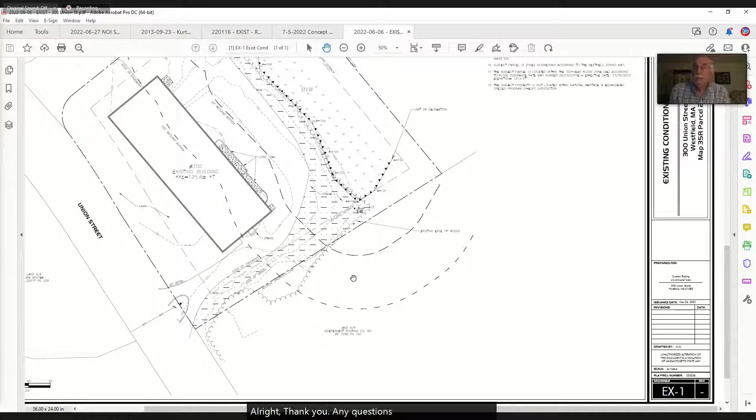I have a personal observation. Having been on the property years ago, I know the gravel area represented on the plan used to be, at least in part, wetland. So I do believe that wetlands have been filled over time.

So even though they're offering that 50-foot restoration, that's great, but I think it goes beyond that.

But I guess how can you show that now? I look for photos, because I was on site and I remember looking at it, but I didn't take photos. So I suppose you could dig down below the fill line and find the original virgin soils and see what they look like. You could request it, but it depends on how far you want to go.

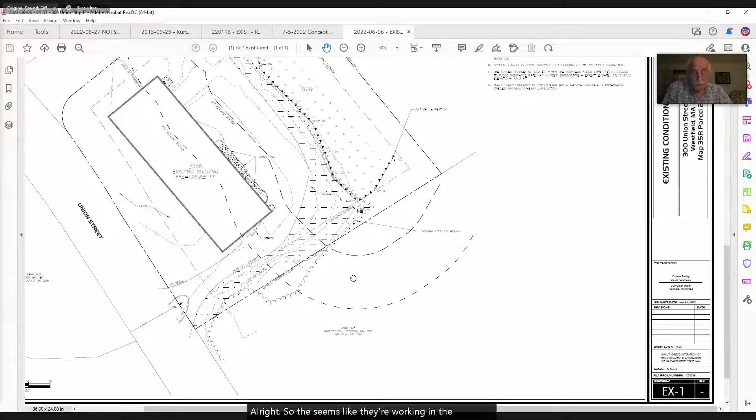All right, so it seems like they're working in the right direction, so I would suggest just continuing this until, perhaps like the last one, once we get the NOI, we can just subsume this into it and close out the enforcement.

Yeah, and at least reclaim the 50-foot buffer, at least what was required to be reestablished. I'm sorry, what was required under the order? What did you guys require?

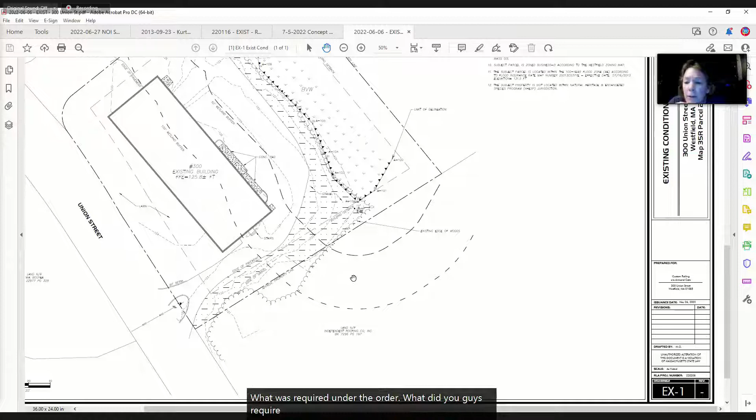Let me see if I can pull it up. That's an excellent question. I don't know if there's still a digital copy. I know that the physical one's sitting in my office. It mentioned restoration, removal of gravel and debris. I think this...

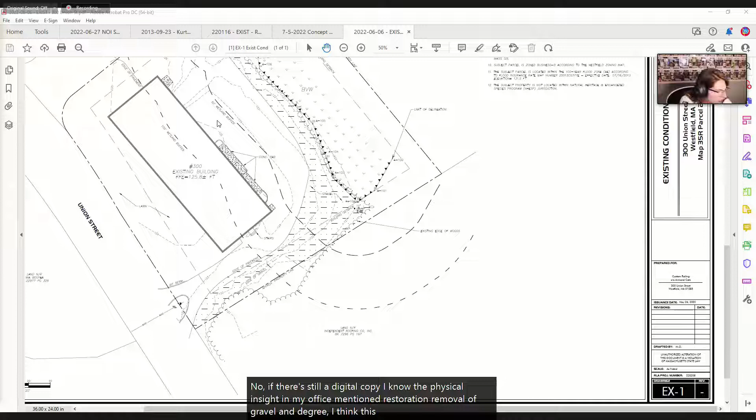I appreciate the kind of looking forward in rolling this into a big project, but it seems kind of clear that this order asks for the immediate removal of that gravel. Is that reasonable to require that within the 50 feet, since at least they're planning to do that as part of the NOI?

It's already been recognized under the order, right? Mm-hmm.

I remember there being quite a bit of trash in there in the wetlands as well when we were there last time. I just think over time they've just been continuously pushing, even just inches each year, into the wetland, into the wetland, into the wetland.

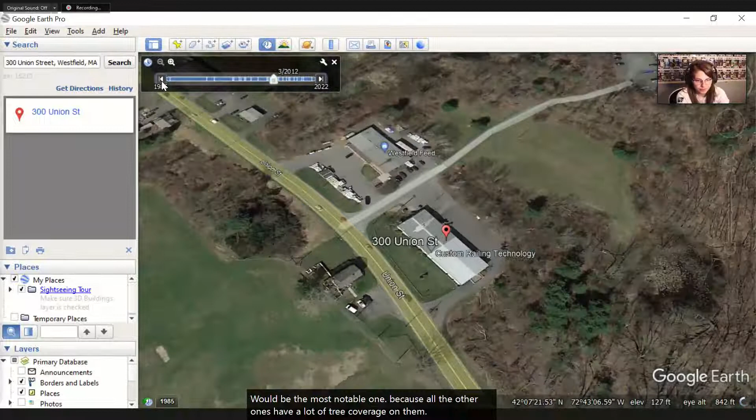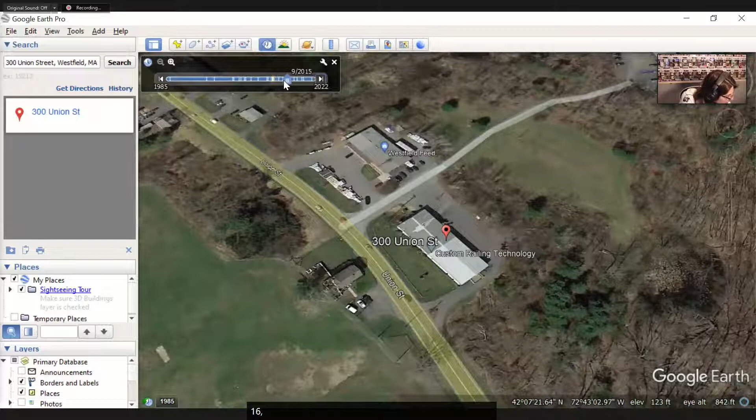It was 2012, versus—get rid of that—2012 versus 2022. So you can really see that it's been added to. It's 2016, 2012, 2022.

Just the Google Earth. So I guess we need a letter to go along with it, to reinforce the enforcement order, essentially just reissuing the enforcement with completion within 2 weeks. I wouldn't say reissue, just re-acknowledging.

Yeah. And then come to the meeting in 2 weeks, and then we can deal with the NOI separately. All right, do we have a motion for the letter?

I'll make a motion that we send a letter reaffirming the original enforcement order and requiring them to appear at our next meeting to indicate that they've complied with our requirements. All right, do you have a second? Yeah, I'll second Carl's motion.

All right, any further discussion? Seeing none—Carl, I seconded, and I should have asked this first, but your motion is saying that they should have it cleaned up in 2 weeks, or in 2 weeks come to us with a plan to clean it up?

Let's put it on them that they ought to clean it up within 2 weeks. That was my thought anyway. So I guess if they're going to work with Ryan, they will be smart enough not to put machinery down in there and things like that.